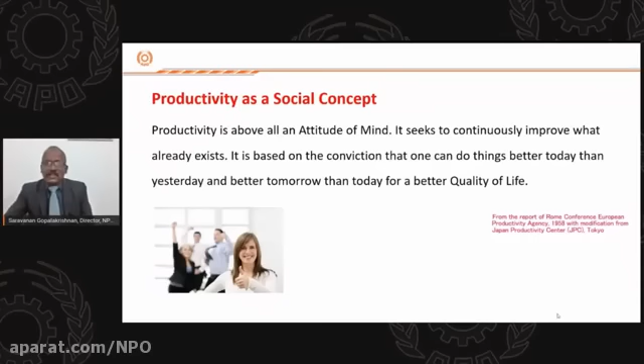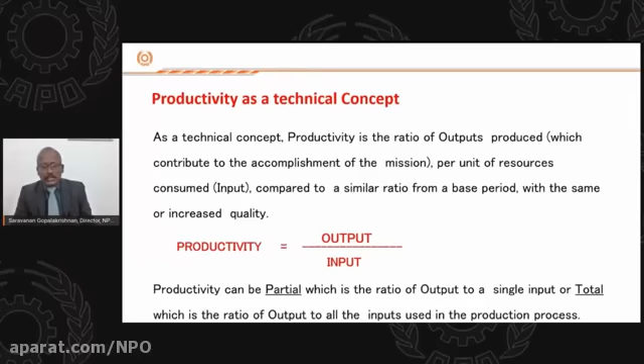This is not the only perspective. If you see the technical concept of productivity, the explanation is that productivity is a ratio of output by input. Output is only one factor, the input is not only one thing. Our productivity can be increased by reducing the input. The input is a combination of various factors like C, L, E, M, S, where you can see the definitions.

C stands for capital, L for labor, E for energy, M for material, and S for other services. When we focus on improvement of productivity or continuous improvement, we can reduce the input. The input can be reduced by reducing any factor or many factors. For example, let us discuss a hypothetical situation where energy and material remain constant, and if we are focusing only on capital, labor, and other services, certainly there will be improvement in productivity and continuous improvement. But we tend to consume the same level of energy and the same level of resources.

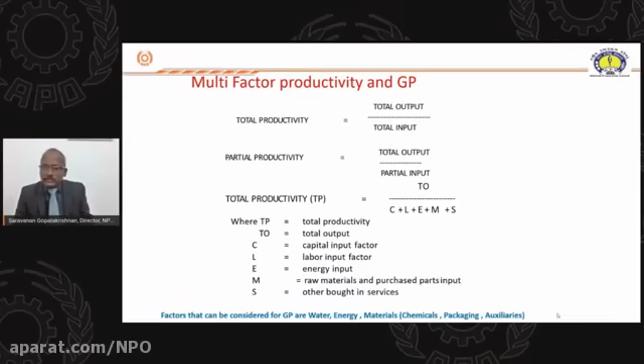Now the question which comes to mind is, is it sustainable? We are having continuous improvement, we are having improvement in productivity, but is the development sustainable? So, instead of merely focusing on productivity, where the focus is on reducing some factors of the input, we started speaking about green productivity.

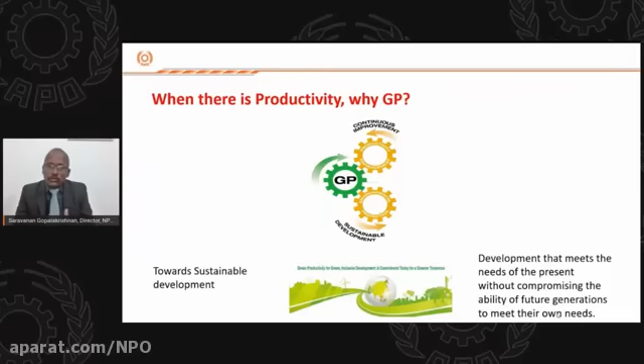In green productivity, the thrust is on reduction in the factors of input, which is energy and material. For example, if you reduce the energy or material, which are finite in nature, if we can conserve this energy or this material, we are not only looking at development, we are looking at sustainable development—that which meets the needs of the present without compromising the ability of future generations to meet their own needs. So when productivity is focusing merely on continuous improvement, green productivity focuses on two sides: continuous improvement, and at the same time, sustainable development. So we will have multiple benefits out of green productivity.

This green productivity is a concept propagated by the Asian Productivity Organization, whereas similar tools, technologies, or techniques are being followed by many countries or multilateral agencies under different names. These include pollution prevention, waste minimization, cleaner production, waste reduction, and eco-efficiency. Even in India, in the last portion of the 20th century, the Government of India encouraged organizations to adopt a similar concept through waste minimization circles. This concept we are discussing is similar to waste minimization, but the name given to it is green productivity.

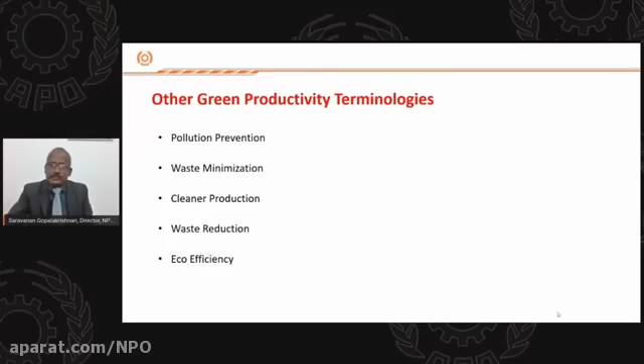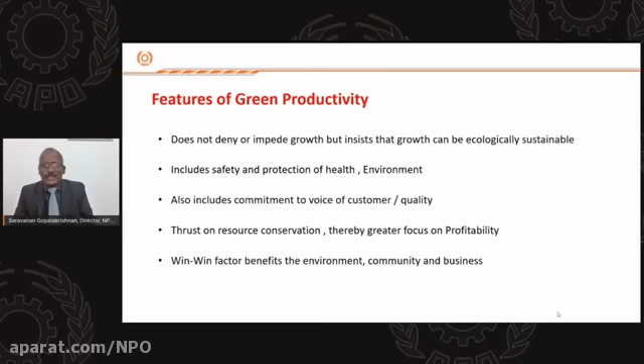What are the important features of green productivity? For example, tools that tend to reduce emissions or material consumption don't focus on profit or such things. Whereas green productivity, while focusing on reducing emissions or material consumption, in no way impedes growth. It also focuses on profitability, and gives due importance to safety, health, and environment. So it's a win-win factor for the environment, community, and business people.

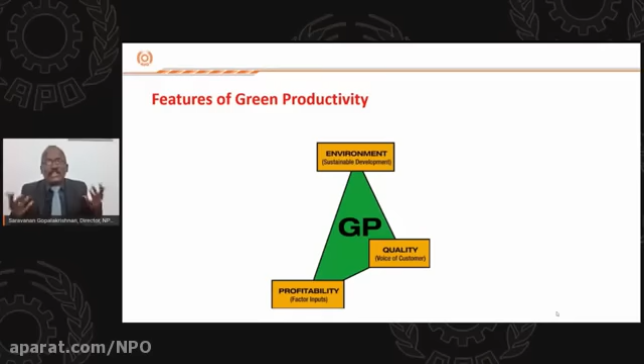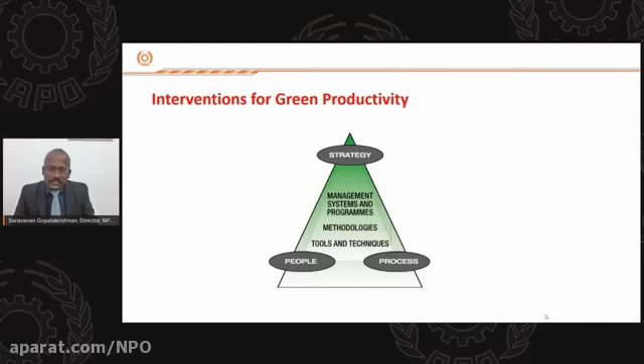So with so much benefit from green productivity, how can organizations implement it? What should be the intervention for green productivity? There are three important stakeholders: people, process, and strategy. By selecting or involving people through good process and a well-defined strategy, green productivity can be attained by the organization. Towards attaining this, there will be a lot of tools, technologies, techniques, methodologies, systems, and programs.

In a nutshell, logically speaking, how to achieve green productivity? The first step is to identify where the wastes or emissions are generated. The second is why the wastage or emissions are generated. The third is to find out how these wastages or emissions can be eliminated. Logically speaking, these three are the main things: first, identify where wastages are coming from; second, why they are coming; third, will it be possible to eliminate them? If not possible to eliminate, can we at least minimize the wastages? This speaks about the total green productivity.

As mentioned in the previous slide, a variety of tools and techniques could be used towards green productivity. Some time-tested tools aimed at reduction of wastages can be used for attaining the objective of green productivity also. Such tools are lean manufacturing tools, and also one important tool called material flow cost accounting.

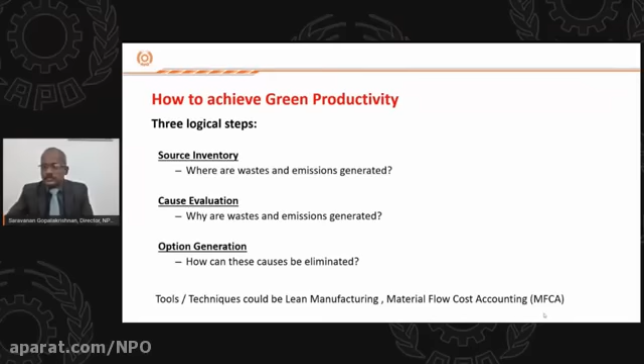I am very much fascinated by one important quote of Mr. Picasso, a well-known artist. As a green productivity practitioner, I am fascinated with his quote where he describes art as removing unnecessary things. As a green productivity professional, my role or intention is also to identify the unnecessary things, identify the wastages, and eliminate them.

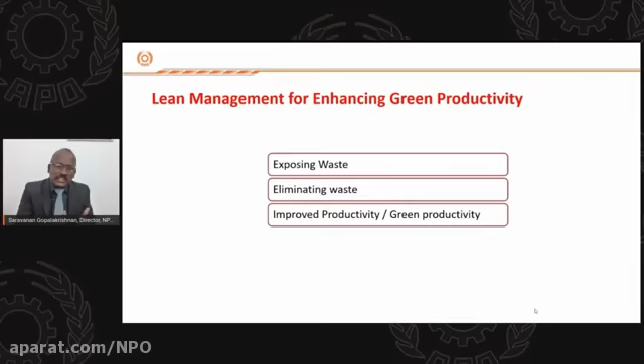We are going to discuss two tools or techniques - one is lean management and the other is material flow cost accounting. First, let us start with lean management. This lean management is nothing but a set of tools and techniques which is aimed at exposing the waste and eliminating the waste towards improved productivity, or green productivity.

If we have to implement lean, we should be very clear with an important terminology or concept. One is value added activity and the other is non-value added activity. If you go to any organization, there will be a lot of activities happening, but can we say all the activities are adding value to the process? Certainly not. Value added activity is the activity for which the customer is interested to pay. Non-value added activity is the activity happening in the process about which the customer is not interested, or he or she is not going to pay. Such activities can be termed as non-value added activity, or MUDA.

So lean has a set of tools and techniques which can be aimed to identify different types of wastages. Some tools can be used to eliminate some set of wastages also.

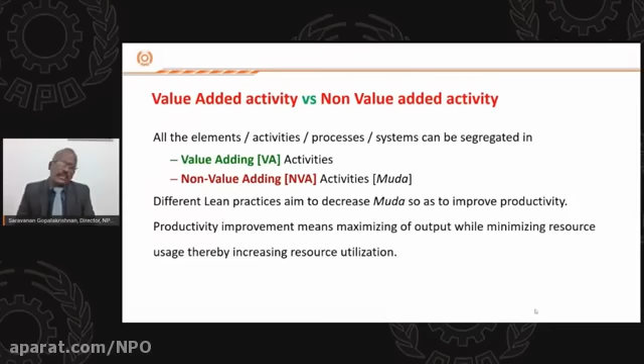If we have to define lean based on the previous slide, lean manufacturing or management can be defined as a systematic way to deliver highest quality of products at lowest cost with the least lead time, with the relentless elimination of wastages. So lean focuses on quality, cost, and time. All these three things are going to be achieved by relentless elimination of so-called wastages.

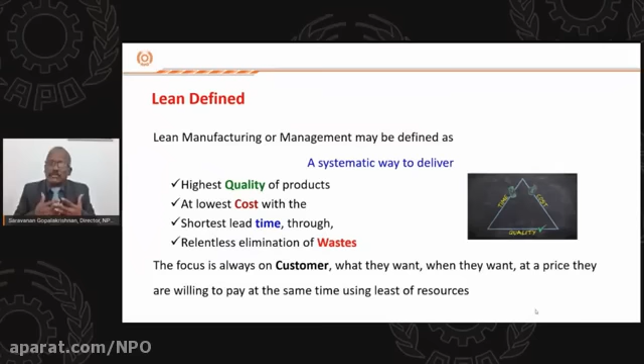The additional important thing with respect to lean is the focus is always on the customer - what they want, when they want, at a price they are willing to pay - using the least resources. So when we are using the least resources, our end objective of green productivity also will be attained.

As per lean manufacturing, there are 7 different types of wastages. Those can be described as overproduction, excess motion - it may be the motion of operator or machine - excess waiting, which can be the waiting of operator or machine, excess transportation, where mostly material is being transported in organizations, over processing, excess inventory, and defect, rework, or scrap.

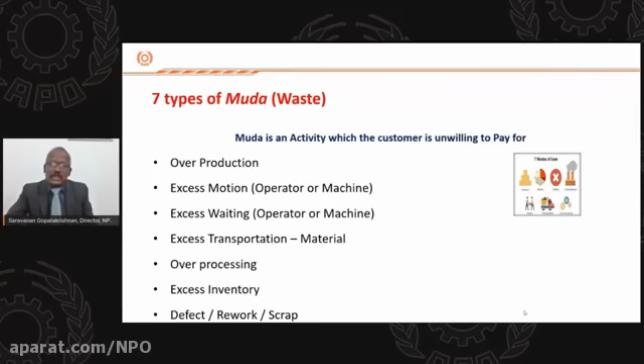If you go to any industry and ask about waste, by and large people feel that defect, rework, or scrap is the only waste in their organization, whereas they are not concerned about the previous 6 different types of wastages. But as per lean, all these 7 are equally important and have to be identified and eliminated. Let us see one by one.

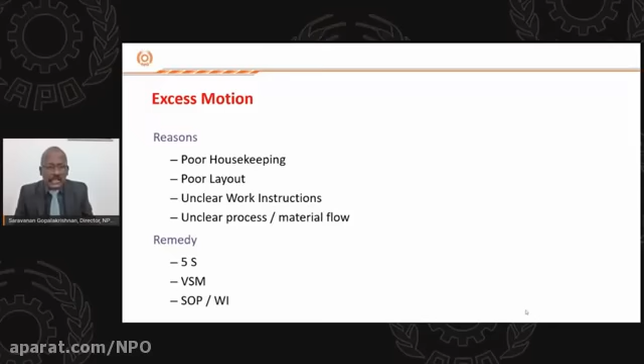The first wastage is excess motion. What could be the reasons for excess motion? It may be because of poor housekeeping, poor layout, unclear work instructions, or unclear material flow. If these reasons are prevalent in the organization, there are some remedies from lean manufacturing - this could be 5S, value stream mapping, SOPs, or work instructions.

The second important waste as per lean is waiting. It may be because of the operator or machine. The main reasons for waiting may be imbalanced line, excess workforce - the workforce may not be flexible - unscheduled maintenance, high setup time, and also sometimes shortage of material or manpower is a reason for the waiting.

If these are the reasons, then the remedy for removing waiting is line balancing, value stream mapping, total productive maintenance - this will help improve maintenance practices and increase machine availability - SMED, single minute exchange of die, so if there is any problem with setup time taking too long, that can be reduced through SMED, and just in time.

For example, if you are getting the material too much in advance, it has to wait till you start focusing on it for the operations. On the other hand, if you have a practice like just in time, it will help your vendor give the material at the stipulated time, so that unnecessary or unwanted waiting of material can be avoided.

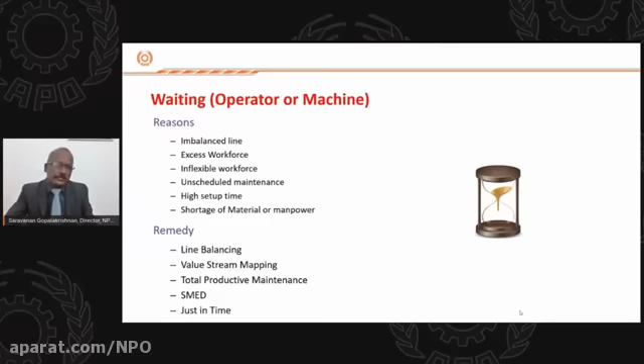The third, and the most cruel waste in the organization, is transportation, because transportation mostly involves material. Because of transportation, sometimes there are damages happening to the material, it affects the safety of workers, it involves sizable resources, and in some organizations they use energy for transportation. So this is the most cruel wastage as per lean.

If you wanted to improve your productivity or implement lean, one of the first steps could be to identify wherever you are having this unwanted transportation. The reasons for excess transportation could be poor layout, poor route planning, distant suppliers, and line imbalance.

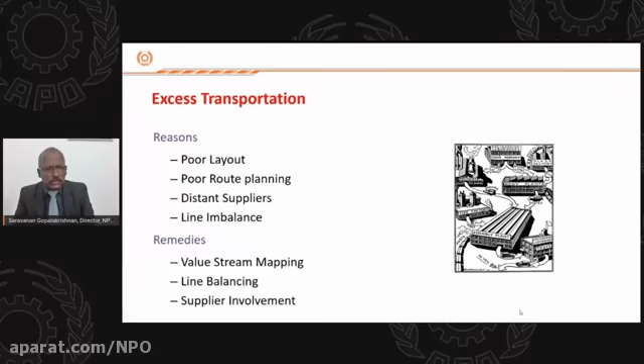The remedies for these reasons could be value stream mapping, line balancing, and also supplier involvement.

Another type of waste as per lean is over processing. The reason is unclear customer specification. If your organization doesn't know the exact requirement of the customer, you will tend to do things as per your perception, resulting in over processing. Other reasons could be frequent design changes and excessive quality changes. Whenever there are frequent changes, people are not clear what they are supposed to do, so to be cautious they start doing excess, which results in over processing.

There is also inadequate value analysis. Whatever you give to the supplier should fetch you some value, or give some value to the customer. For example, if I am selling something for $1, whatever I am doing should be worth only $1. I should not start processing equivalent to $1.5. So there should be some value analysis.

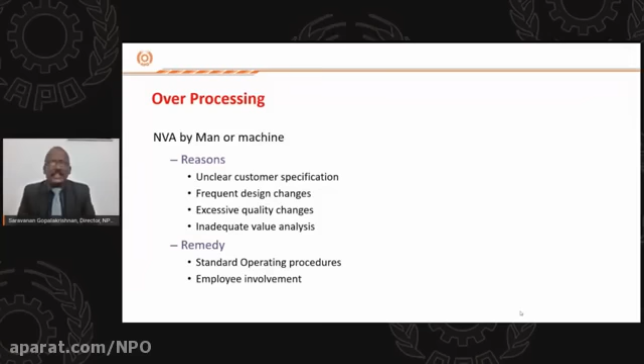So the remedy for over processing could be standard operating procedures and also employee involvement.

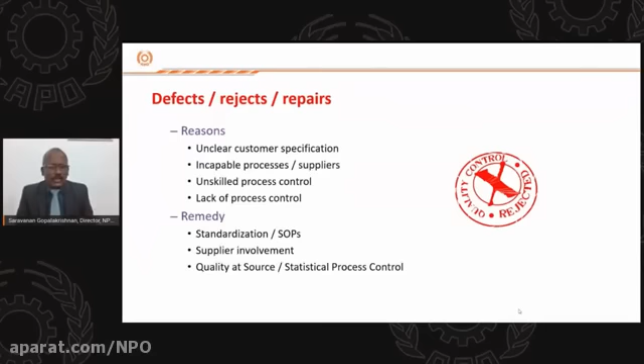Other normal wastages prevalent in the organization are defects, rejects, and repairs. The reasons may be mainly lack of process control, unskilled process control, or incapable process. Sometimes it could be because of unclear customer specification. The remedy for these defects are standardization, supplier involvement, quality at source, or also the implementation of tools and techniques like statistical process control.

The next type of waste as per lean is excess inventory. The problem with inventory is it may be raw material, work in process, or finished goods. There are two main problems with excess inventory. One is whenever we are storing things for more time, there is a chance the material can deteriorate, resulting in loss of material because of storage over a particular time. The second thing is, whenever you are storing material, you are blocking some capital.

Nowadays organizations are having a problem of cash flow. So whenever you are reducing inventory, you have two benefits. One, you are preventing material from unwanted damage or deterioration. You are also increasing the cash flow of the organization by avoiding the blockage of capital.

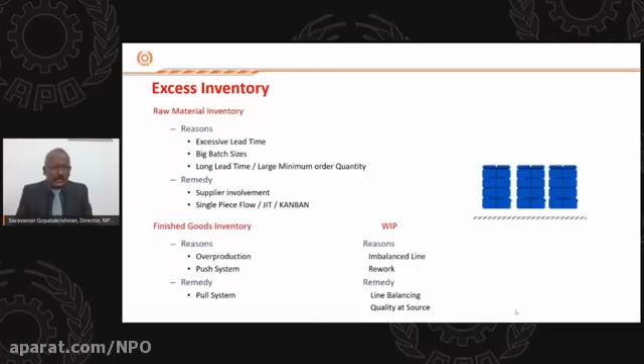So the remedy could be concepts like JIT, Kanban, line balancing, and pull system.

Similar to inventory, whenever you are producing more -- for example, if I'm supposed to sell 10 units, but I make 20 units of that product, 10 units will be sold to the customer and the remaining 10 units will be stored in my warehouse. The reason for this could be a push system and also unclear customer requirements.

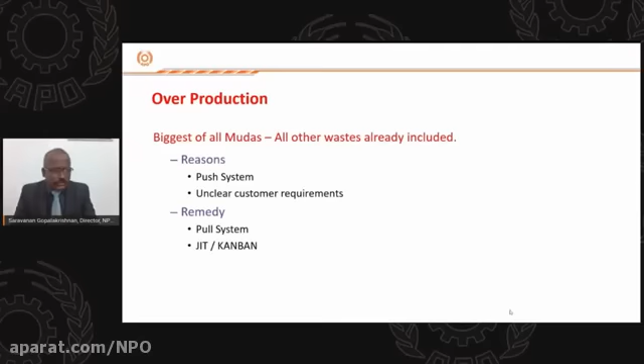Similar to inventory, there are two main problems here. Whatever product I am storing in my warehouse can become outdated, can get damaged, can get deteriorated. The second thing is I am blocking the capital. So lean is aimed at avoiding overproduction, which could be achieved through a pull system or concepts like JIT and Kanban.

So in the past 10 minutes, we have discussed 7 different types of waste. If anyone is interested in implementing lean to eliminate this wastage, what should be the way forward? The first thing should be to visit your shop floor and classify the elements as value added or non-value added activity.

Then the wastages can be eliminated by 4 easy ways. First, find out the way -- can we eliminate the non-value added activity? Ideally we should eliminate it, but practically it won't be possible to eliminate all non-value added activity, so wherever feasible we should eliminate it, and wherever not feasible we should try to minimize it.

The second thing is, wherever some activity is happening, can we combine the activities so we can do it with less resources -- less manpower, less material, less energy? The third thing could be rearranging; in some cases rearranging will result in reduction of time and resources. The fourth thing is, can we simplify some process?

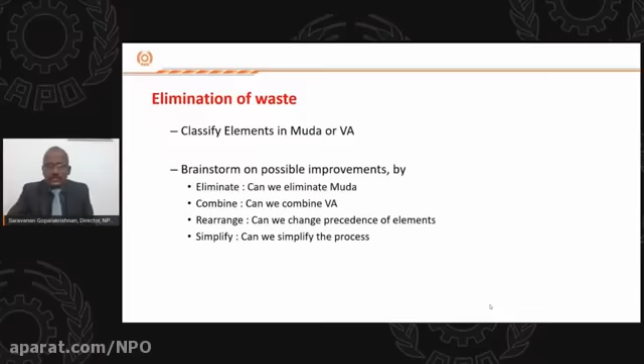The second thing should be to combine the activities so that we can reduce some resources. The third thing is rearranging. The fourth thing could be, can we simplify the process? If we simplify the process, sometimes it results in reduced lead time and reduced consumption of resources. As I was telling earlier, this lean manufacturing is a set of more than 13 tools.

Each and every tool has some benefit. It can be targeted or implemented based on what is called diagnosis. Whenever you go to an organization to implement lean, first you identify what is happening there. When we discussed the 7 wastages, the first thing we saw was what is the problem. So based on that problem, the solution should be some of the lean tools.

For example, if the workplace is not in an orderly fashion, the solution is 5S. Another example, if you feel there is a lot of non-value added activity, the organization should go for the implementation or practice of value stream mapping. At each and every place, what is the value added activity? What is the non-value added activity? How can it be reduced? So tools like value stream mapping will help you reduce the non-value added activity.

The third thing is line balancing. As we were telling, when there is a lot of waiting, it may be because of lack of balance. If one activity takes 10 minutes and another activity takes only 5 minutes, and if all are in the same line, the second person will be waiting for 5 minutes till the previous process is completed in 10 minutes. Whereas line balancing is aimed at having all the work centers with similar or the same cycle time.

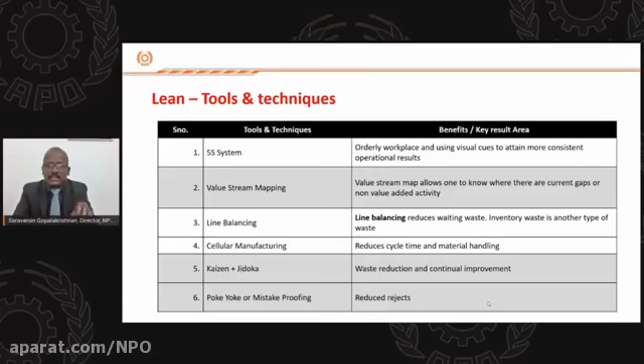So the other tools may be cellular manufacturing, Poka-Yoke, just in time, Kanban. Whenever you have a problem with availability of machines, whenever you want to improve your overall equipment's effectiveness, you can go for tools and techniques like TPM, single minute exchange of dies. If you have a problem of too much setting time, SMED is a tool for you. Whenever you have a lot of quality rejects, you can go for statistical process control. When there is a lack of consistency, you can go for standard operating procedures.

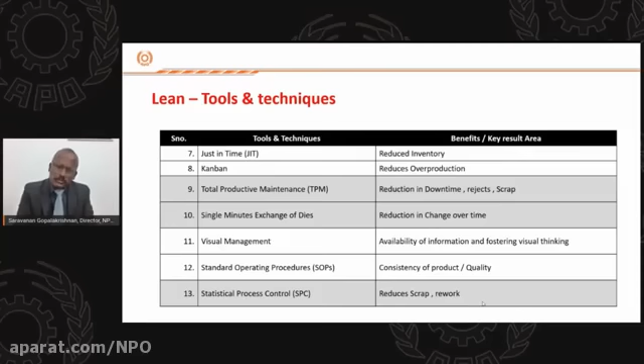So we have different lean tools and techniques based on the necessity or based on the problems on the shop floor. We can implement these different types of tools and techniques. Earlier, these lean tools and techniques were implemented only on the shop floor, but nowadays these lean tools and techniques are equally implementable in the service sector also.

Now we have discussed the concept of lean. Now I would like to share some success stories of lean implementation in India by the National Productivity Council. The government of India observed that lean is a very important tool for improving competitiveness.

It observed that major corporations are able to hire consultants and implement this lean, and their competitiveness is increasing. Whereas in India, there are a lot of micro, medium, and small scale enterprises which are manned by very few people. Their capital is also very, very less. They do not have access to hi-fi consultants. So the government of India came out with the scheme, Lean Manufacturing Competitiveness Scheme.

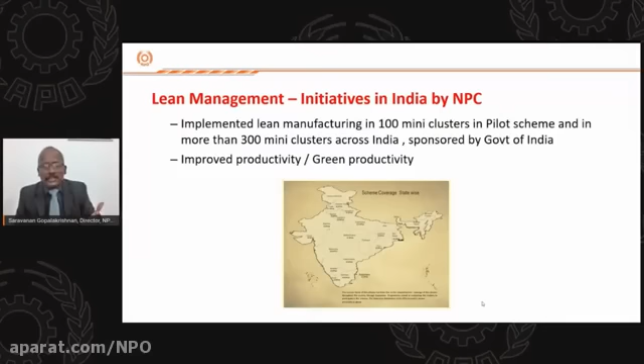It implemented this lean manufacturing in more than 500 mini clusters, whereas NPC implemented it in 400 mini clusters across India. You can see in the presentation the map of India, and also how many mini clusters were there in each and every state. When I speak about the 400 mini clusters, each and every cluster may have from 6 to 10 units. If we take an average of 8, 400 into 8 is 3,200 MSME units. The National Productivity Council implemented this lean manufacturing and helped them improve their productivity and at the same time increase their competitiveness.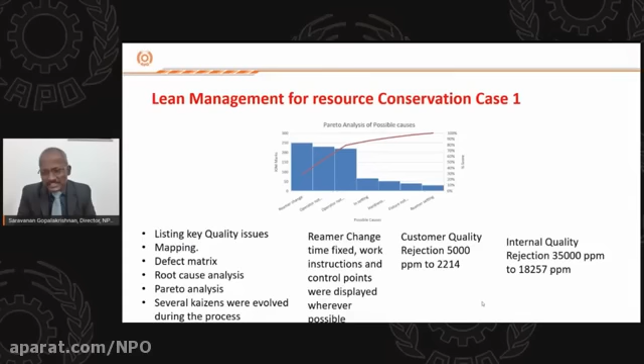And immediately we can see some improvements in the quality trend also. The customer quality rejection came down from 5,000 ppm to 2,214 ppm. Internal quality rejection came down from 35,000 ppm to 18,257 ppm. So by this reduction in rejections, there is a sizable reduction in resources, material and energy. The customer satisfaction and employee satisfaction also improved.

The second case is pertaining to an organization using a cupola furnace. Based on their comparison with peers, they found out that they are using bed coke for heating in the heater of the cupola furnace. They found that the consumption of bed coke was very high in their industry. When we approached them, they told that their main problem compared with other organizations is that their bed coke consumption is very high. Then we started probing.

First question we asked: where are you using the bed coke? Why are you using the bed coke? How much are you using? What is the reason for using this much quantity? In some places they were able to give the answers, but they did not have a very good or justifiable answer to justify 500 kgs in a batch.

Then we took some trials: 500, 475, 450, 425. In fact, to our surprise, when they fired the cupola furnace metal with 500 kgs of bed coke, they were having some quality problems also - the fluidity was also a problem. But when firing with 425 kgs of bed coke, there is a sizable reduction in bed coke, and also the quality level or fluidity has increased.

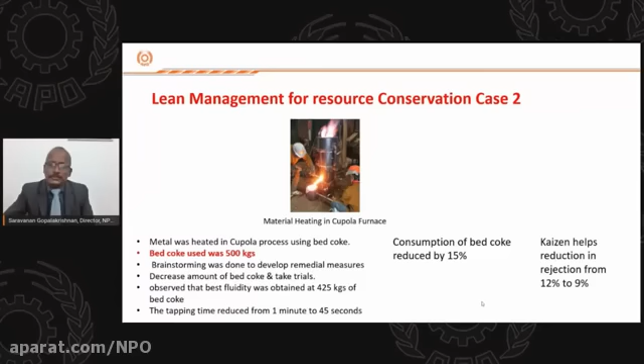The third thing is, we saw in an organization they were telling that they are not happy with the finishing. Then we started probing further. What is your problem with the finishing? They're telling that some operation is happening after the painting, then the painting is peeled or it is going away. Then we probed further.

Before that operation, they are doing some cutting. When we asked why there is a need for the cutting, they said the teeth is having extra size, so there is a need for cutting. Why is the teeth having extra size? We saw the pattern - the pattern is having the highest level in the specification. The teeth was made at the highest level in the pattern. So only the teeth is having extra dimension, which needs to be cut after the painting.

When they are cutting, it is causing some damage in the finishing. So we concluded that the pattern needs to be modified with a reduced specification. The pattern was made with a reduced specification, and the unnecessary cutting is avoided. So there is a saving of material, and the rejection has come down.

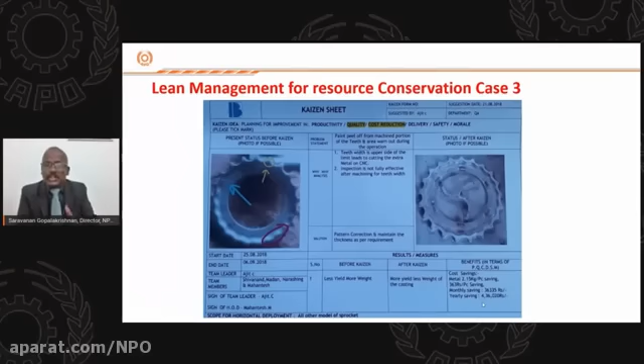So this we did for one product. And when we did this for one product, it can be horizontally deployed for multiple products in the organization. For example, with this one product only, they were able to save around 4,36,000 Indian rupees. So they're all MSME units - for them, 4,36,000 rupees per annum recurring is a very, very big improvement. The fourth case I would like to discuss is one where the material is stacked in wooden boxes or wooden packed containers.

They started with a problem: excess requirement of space for wood storage. Then we started probing further - why do you want excess storage? There is a requirement for storing the wood. Why do you want to have wood? We need to stack our material in the wood. And this wood is also not reusable.

From wood, we changed to a collapsible steel container, which is reusable. Now the space problem is also solved, and material consumption is also reduced drastically. The cost saving is to the tune of 6 lakh Indian rupees, and that is also recurring every year.

So from these 4 cases, you might have concluded very safely that lean is a very important tool which helps in the reduction of wastages. It can be used in the reduction of resources also. And if you see all these 4 cases, the investment required is very, very less, maybe except the 4th case where there is a very minor investment. In the other places, there is no investment at all, whereas the benefit is to the tune of many lakhs of rupees. So this is all about lean manufacturing.

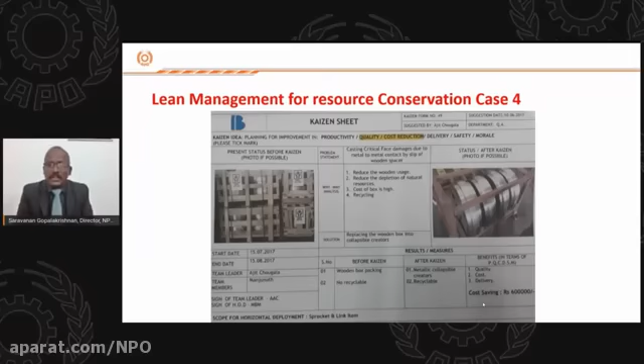Now let us go to the other concept, MFCA. This material flow cost accounting is a tool developed in Germany in the late 1990s, and in Japan more than 300 companies have adopted it. It can also be used in conjunction with environmental management system, that is the ISO 14000 family.

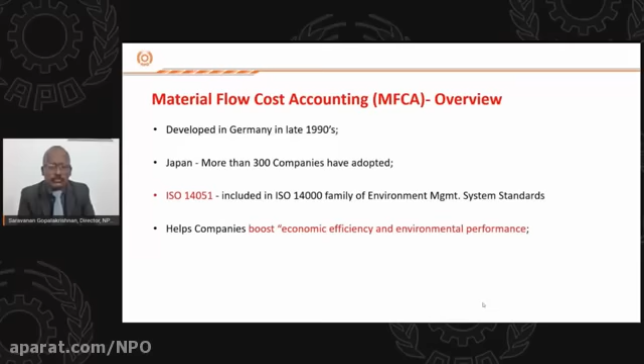If you see what is MFCA, this material flow cost accounting is a tool which helps you identify how the material is flowing. It increases the transparency of material use practices. Once you are transparent, once you know how much material is used at what places and what output you are getting, then you can take suitable interventions or actions to reduce unnecessary wastages.

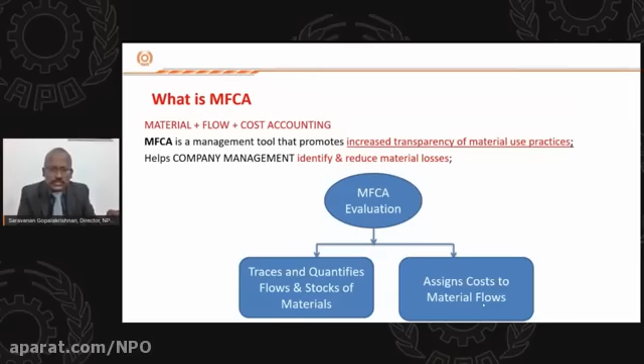There are two important perspectives of MFCA evaluation. The first is it traces and quantifies the flows. The second is it assigns cost to each and every material. There are some 4 cost elements as per material flow cost accounting.

The first thing is material is costed. The energy is costed. The third thing is, whenever we are doing some process, because of labor, depreciation, maintenance or transportation, we are incurring some cost, so we assign some cost to the system also. The fourth thing is the cost incurred towards waste management, that is waste handling, storage, treatment and disposal, reworking of rejected products, recycling, etc.

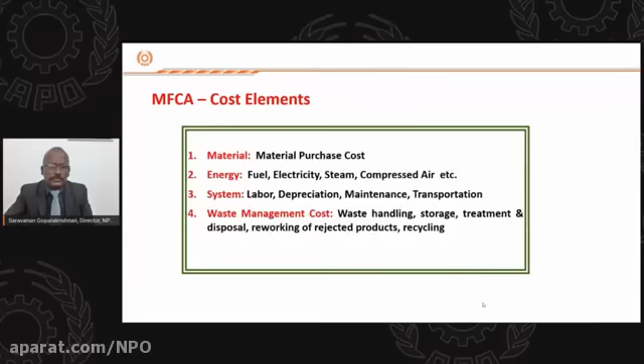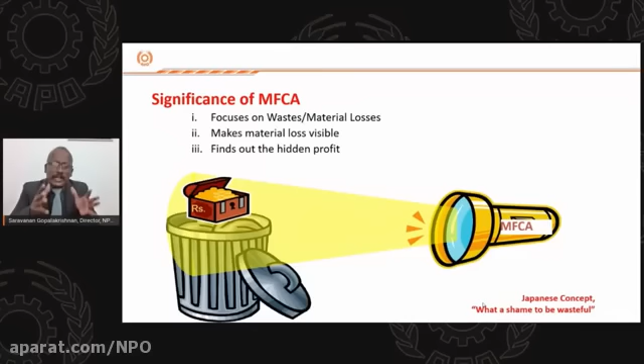The significance of MFCA: we all speak about waste, but the thing which is waste for us may be useful for somebody else. So we should not use the term waste at all. As the Japanese concept says, what a shame to be wasteful - nothing is waste. So material loss, once it is visible, you find the hidden profit. When there is a lot of material loss, this MFCA helps you identify where the losses are, and then you can come out with a good solution.

When you are implementing this concept called material flow cost accounting, these terminologies are very important. The first one is quantity centers - that is the place where the material is stored, or the production process is happening, product is stored, or the disposal system. So the quantity center is the place where the material comes in, something goes out as output, and something goes as waste.

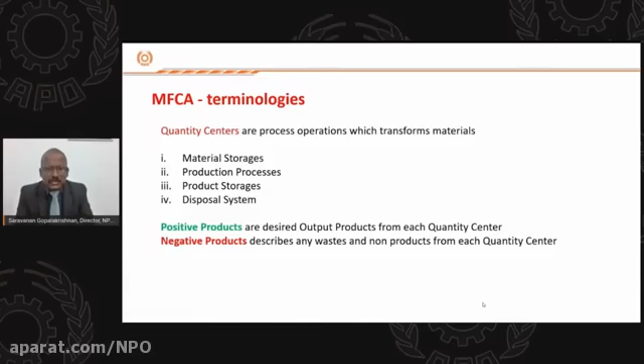Then the next thing is positive products. Whatever we call the product or useful output can be termed as the positive products. Whatever we termed as waste is not really waste - it can be termed as the negative products from that quantity center.

This is the pictorial representation of a quantity center. A quantity center is nothing but a place where some production or activity happens. You give some input materials, there will be output from that work center as good products, and from that work center some so-called wastages may go, maybe in the form of solid, liquid, or gases. So you find out what are all the losses or negative products coming from that cost center.

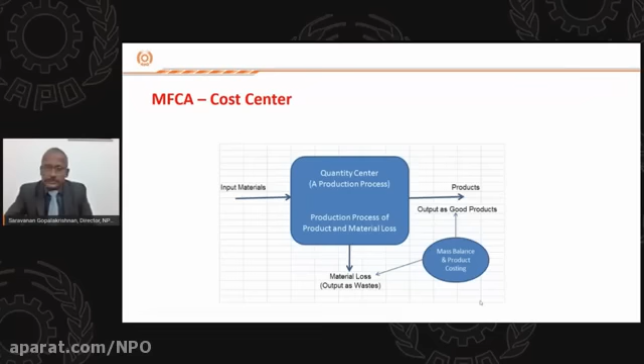Once you identify the negative products coming out, and if you start assigning value to that negative product, it will give a lot of visibility. Once you know how much is being lost in that place, you will come out with a suitable intervention to reduce the loss. The name itself tells about material flow cost accounting - there is traditional cost accounting, and now we are discussing material flow cost accounting.

In traditional cost accounting, the total cost is attributed to the good product. No amount is being attributed to the negative product. Only the waste disposal cost is accounted for the negative.

Whereas in MFCA, whenever some negative product is coming, you appreciate the fact that some amount of material and resources is used there. So some financial value has to be attributed to the negative product, and then, as usual, we should attribute some waste disposal cost also.

Let us take a small example. We take 100% material of 100 kg, which costs Indian rupees 100. Some process is taking place where the good product or positive product is 80%. So for getting this 80% of product, we are incurring cost of rupees 100 in the form of material and rupees 60 in the form of processing. Totally 160 rupees is incurred for getting this 80 kg of output.

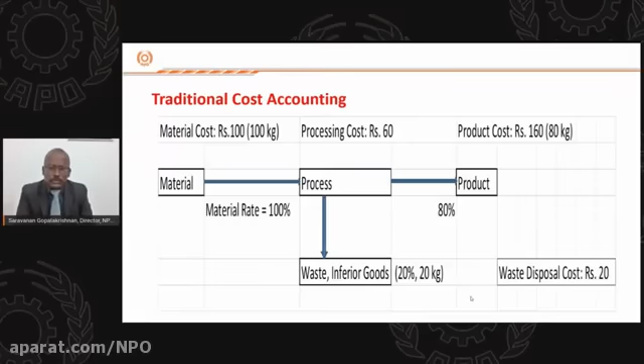The negative output, if you see, we are getting around 20 kg. No financial value is attributed to this 20 kg. We are just seeing the waste disposal cost is 20.

On the other hand, if you see this material flow cost accounting, the same thing: the positive product is only 80%. Here we are telling that out of the total cost of 100 rupees plus 60 rupees, only 80% is coming as the positive product, so it is only 128.

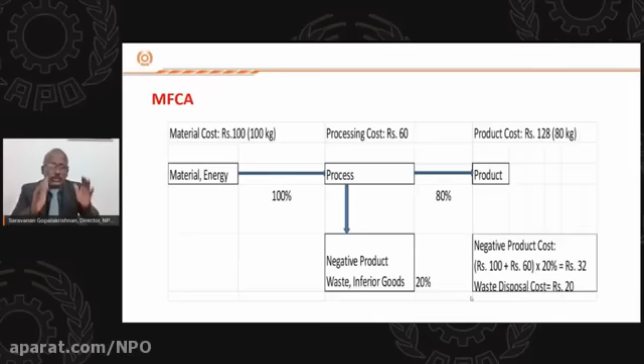Something is coming as a negative product, which is around 20%. 20% of 160 is around 32. The value of the negative product, which includes material and processing cost, is rupees 32, and the waste disposal cost is 20. You can see the difference between traditional cost accounting and MFCA.

In traditional cost accounting, no cost is attributed to the negative product, so it is 0. Only waste disposal cost is shown, that is 20. So the total cost is rupees 20 as per traditional cost accounting.

Whereas in reality, as per MFCA, some amount of material is being wasted, some amount of processing is being wasted, that accounts to rupees 32. The waste disposal cost is rupees 20 as usual. So the total cost of the negative product is rupees 52.

If you see in traditional cost accounting, it is 20. As per MFCA, the total cost of the negative product is 52. Once you come to know that this much cost is being wasted, you will come up with a methodology to reduce it.

This speaks about the MFCA implementation cycle. If any organization is interested in implementing MFCA, they can first select the suitable products. They can start from gate to gate, or from some point till some other point. First you identify the products, then you identify the boundary.

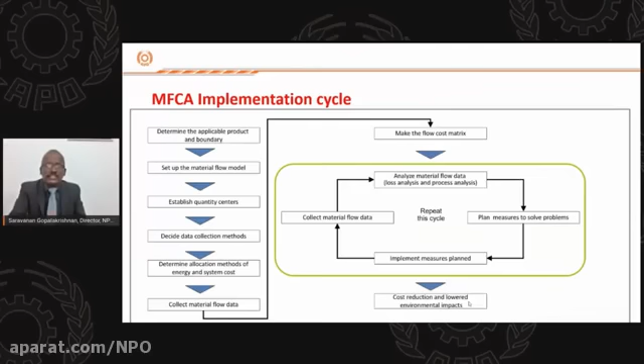We are ideally aiming at a place where 100% will be positive products. So today I may have 80% positive product and 20% negative product. I may come out with a solution to reduce the negative product from 20% to 18%. Will my journey be over? Not necessarily, or certainly not. Then I have to reduce the negative product from 18% to 16%. So this is the MFCA implementation cycle.

Even in this MFCA, National Productivity Council, in association with the Asian Productivity Organization and also JPC, carried out some pilot projects. We identified some 4 model companies in the state of Gujarat in India. We implemented this material flow cost accounting. There is sizable benefit accrued because of this MFCA.

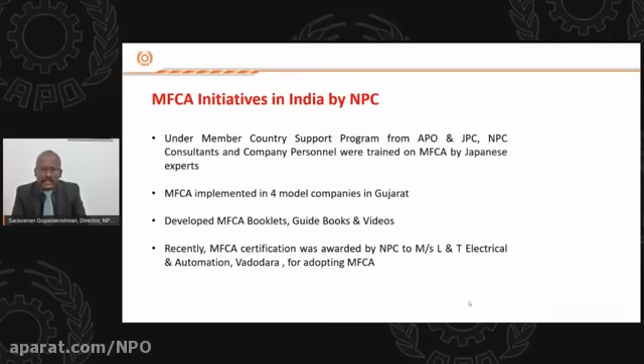Government of India also supported National Productivity Council to propagate this MFCA concept through booklets, guidebooks, videos, and also some training programs. Recently, MFCA certification was awarded to one prominent corporate in India, L&T Electrical Automation, in the state of Gujarat.

I will share 2-3 cases of MFCA. If you take any MFCA, the focus will be on packing also. Before implementation of MFCA, the product was 100% covered. But if you see the customer's specification, they are worried the product should not be damaged during transit, not that it should be 100% covered. So whether 100% covering is required, or 80% covering would be okay, that solution also cropped up.

The second thing is the thickness of the wood - is it that much necessary? So we came out with two interventions. One, the quantity or coverage of the wood is reduced. The second, the thickness of the wood is also reduced.

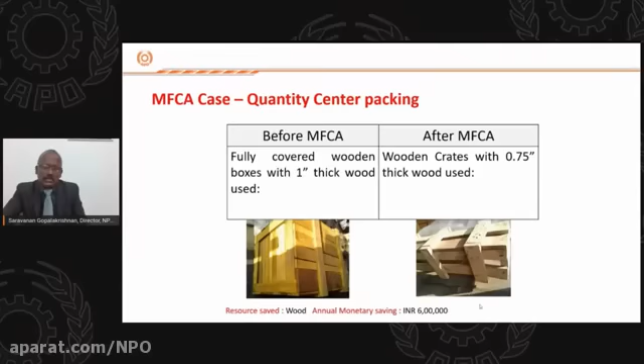Here, the benefit accrued is a sizable reduction in wood, which is a recurring benefit in terms of lakhs of rupees. The other thing is, when we implemented this MFCA, one of the important wastes which goes out is what is called waste air with some heat.

Whenever we are sending gaseous emissions from our organization, and if it goes out with heat, that is nothing but energy. When implementing MFCA, we came out with a waste heat recovery solution. Because of this, when the exhaust gas was going at around 250 degrees Celsius, one boiler's necessity itself was eliminated, and there is an annual saving of around 60,000 SCM gas.

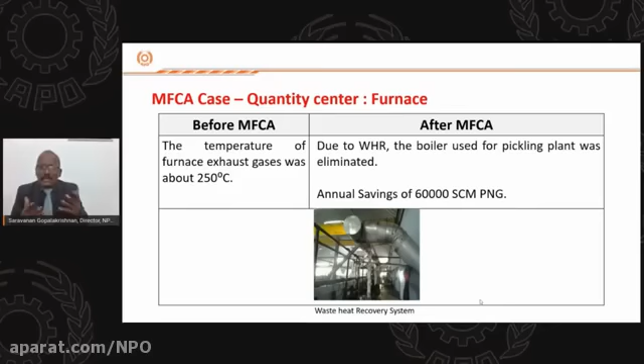So these two cases explain how material conservation is possible with the implementation of tools like MFCA.

Having seen lean manufacturing contributing towards wastage reduction, and MFCA contributing towards material conservation, National Productivity Council came out with a novel tool - can both lean and MFCA be implemented together? Again we approached the Asian Productivity Organization. With their help, we implemented this integrated lean and MFCA in 5 model units near the capital of India. Let me explain one case.

This is a case of one plastic company. First we carried out this MFCA. We were giving around 1,69,691 kg of input. We were getting only around 1,26,000 of output, whereas the remaining material was going as negative product. Something is going as rejection, something is lost in setting time, something is lost because of power failure. The other major chunk is going because of runner and lumps.

The first activity we did was this quantity center analysis - what is the input we are giving, what is the output we are taking. And we concluded the major loss is happening in the runner and lumps.

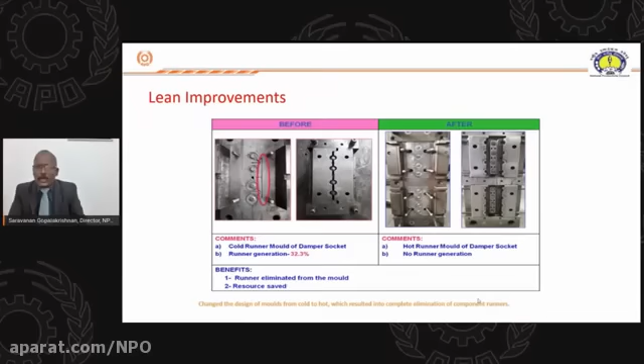That came out with a solution - instead of cold mold, if we move to hot mold, this runner problem can be avoided. By moving from this design to that design, we were able to get rid of this runner problem. So this is one example where sizable resource conservation was possible with the help of MFCA and lean.

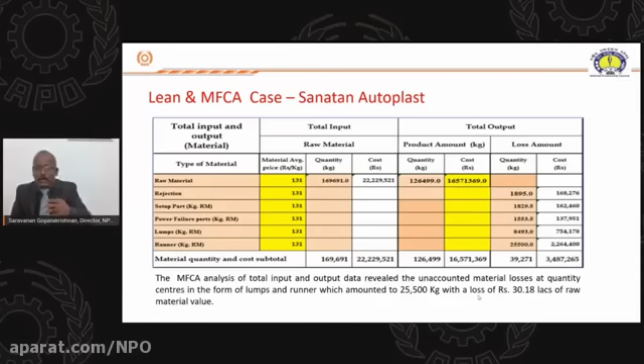At the second place, we implemented this MFCA. We mapped the energy flow and observed that 20% of the energy is being used when the machine is idle, which is not a value-added activity. Then this input was taken for lean implementation.

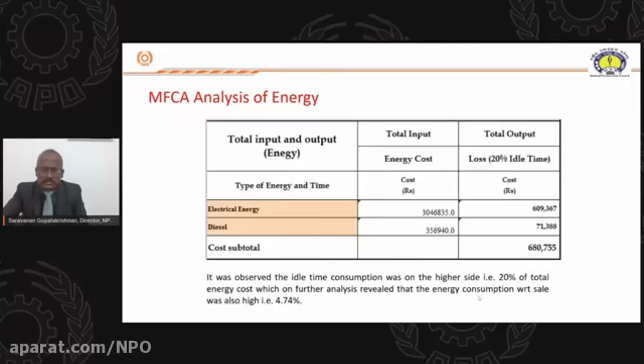We came out with some 2-3 solutions. The first solution - when the machine was idle, it was taking a lot of power. One easy solution is there are techniques or technologies available to have a power saver, which was not available in that organization. We came out with a very easy solution, not a very big idea.

When it is idling, why is this much energy being lost? Why is there no power saving mode? So we came out and installed this power saver.

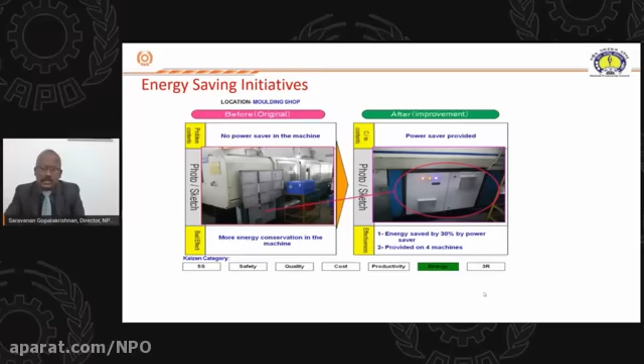The other thing is, heat is being lost when the machine is idle. So we did some metallurgical study also, and we came out with aluminum cased heaters, where the heat dissipation is taken care of, and there is a sizable reduction in the loss.

By having these interventions like power saving mode or coming out with aluminum cased heaters in the barrel, we could save a lot of energy in the organization also.

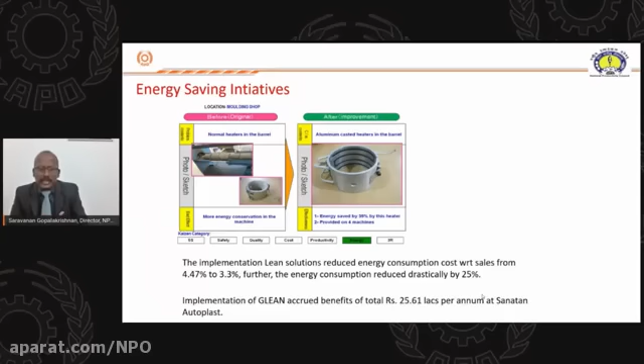We see implementation of this GLEAN accrued benefits totaling around 25.61 lakhs at this organization. I was telling around 5 units were selected for this pilot study with the help of Asian Productivity Organization.

We implemented an integrated lean and MFCA in these 5 organizations. You can very well see this integrated approach has resulted in this saving to the organization, and at the same time, there is sizable saving in material and sizable saving in energy. It is not only for the business, it also goes well with the environment. We are not only going for development, we are going for sustainable development.

So, National Productivity Council, with the help of APO and all, is propagating this lean and MFCA. We have coined the term green lean, and we are propagating this concept to various industries. Nowadays we are also conducting a lot of webinars on this topic. This is being propagated, and it has good potential to improve the competitiveness of the organization, and also good potential to conserve material. With this, I would like to conclude my presentation.

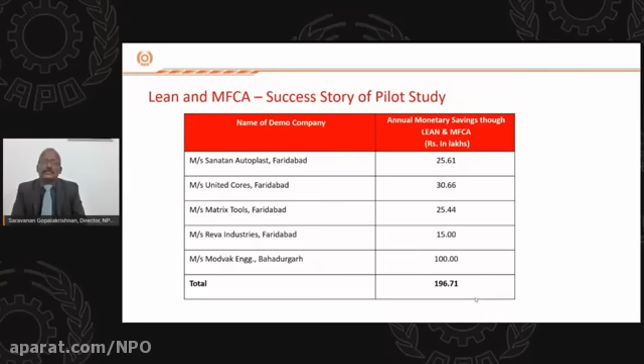Thank you so much for your valuable and insightful presentation. So let's get started with the question and answers. I'd like to ask you several questions. First question is on SMEs. Could you explain how lean and MFCA can be effectively introduced in SMEs? What are some typical barriers and how can they be overcome?

Thank you, Mr. Endo. First, I would like to address the barriers. We implemented this lean MFCA mostly in MSME units. The barriers we observed are, first, lack of awareness. Nowadays there is increased awareness, but even now we have not reached a sizable level where there is good awareness among entrepreneurs about the concept of lean and the benefits which can be obtained from it.

The second thing is about talent pool. If you take the case of MSME units, most of them have very, very little manpower. They may not be trained or have the required skill set to implement concepts like lean and MFCA. The third thing is having a wrong idea or mentality that to introduce concepts like lean and MFCA, we need a lot of capital expenditure.